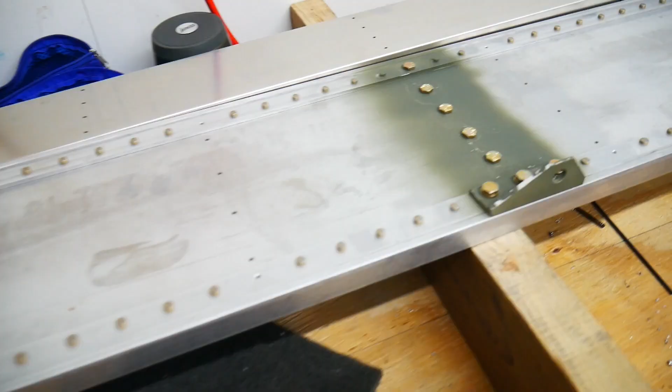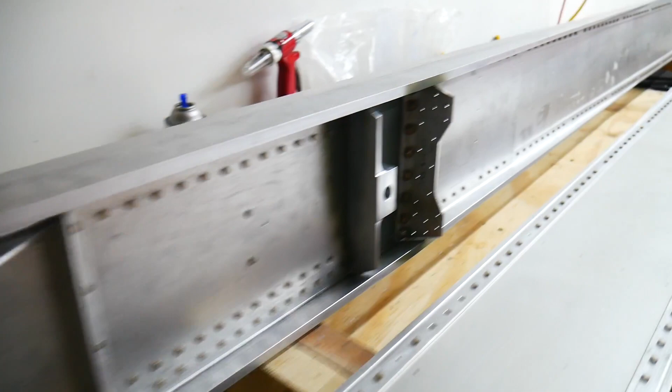Today we're going to be working on assembling our main spar. So just in case you're not sure what a main spar is, the spar is the major component of the wing that holds the majority of the lift that the wing creates. And it's really what needs to be one of the strongest parts of your airplane.

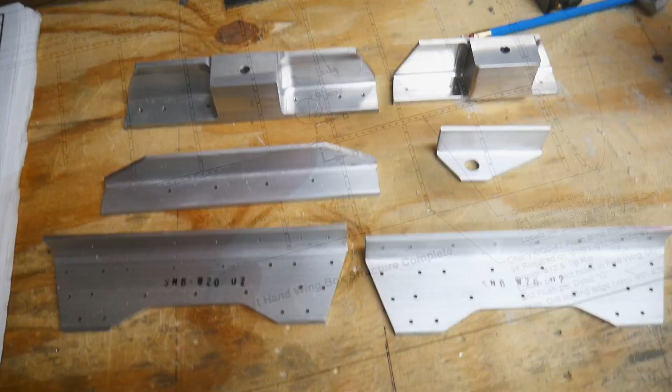But we're going to be adding several blocks to this to give it strength and rigidity. We're going to add in a tie-down mount here as well. And eventually, once we put skins and ribs in place and all that, we'll have a complete wing here that looks kind of like this.

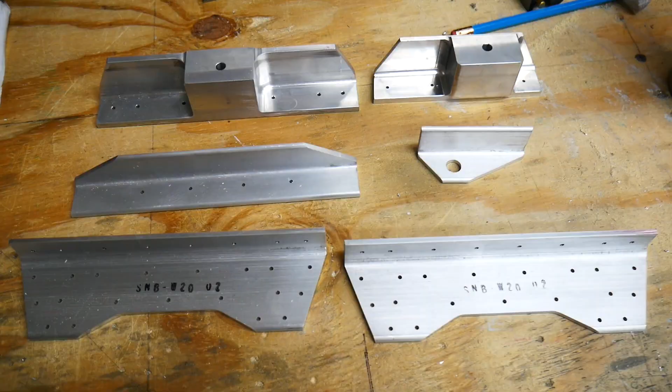So these 6 parts here have to be bolted into certain places on the spar. We also have to add several bolts along this section right here. You can see this one in the back here that I've completed. This is the right wing spar here. The one we're working on today is going to be the left wing spar.

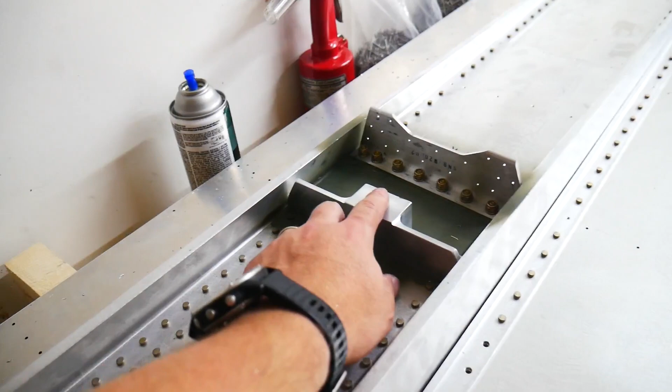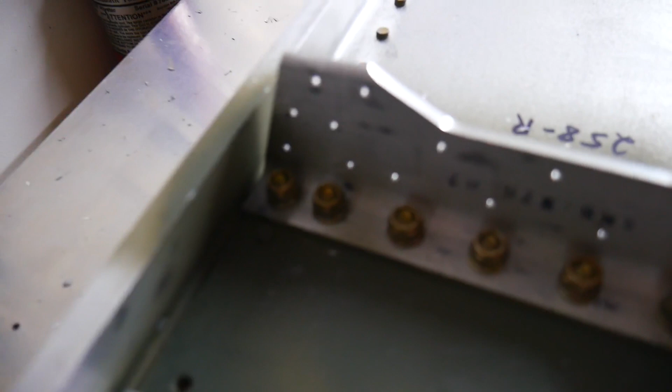I had to drill this hole up to 1/2 inch, which I don't do on the same block that goes on the left. This one here as well goes up to 1/2 inch. And then this main rib assembly piece here, there's lots of bolts to hold it into place. And then if we come down here, you can see where the mount for the tie-down is going to go.

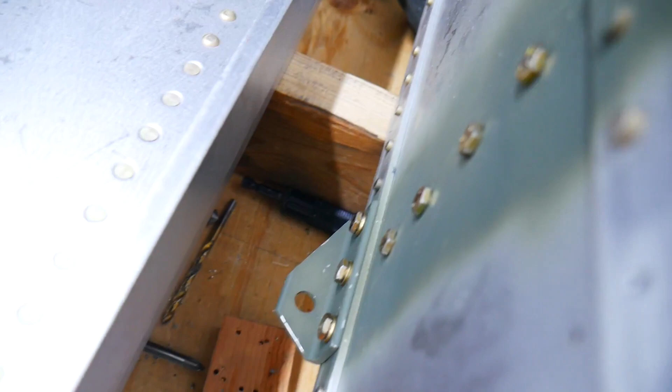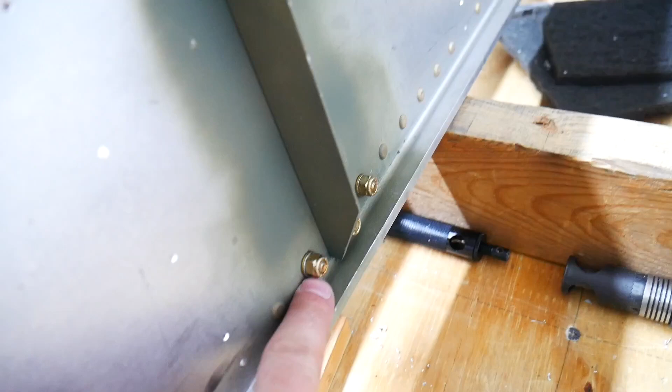Again, the skin's going to kind of go up this direction, so it'll have a tie-down on the bottom of the wing here. So we've got the tie-down mount there. On the back here, there's an angle to stiffen up this outside portion of the wing. I think it's partially to give a good strong support to the tie-down here, but it also will increase strength for torsional rigidity on the wing as well.

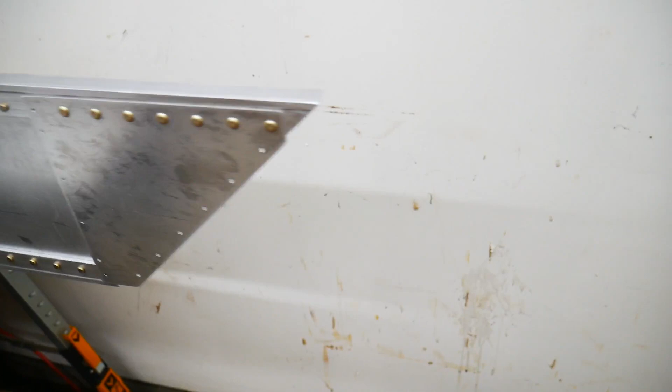There's actually another part that the instructions say to put on. There's like a little angle that will go down here, and to that you can attach the fiberglass wing end. We won't be adding that on today. I'm going to have to move some stuff around in the garage, and that's just asking for disaster. If I put that on, it's just going to end up getting banged up and broken. So we'll leave that off until we're ready to add that.

Now that I've got a little bit more space to work, let's get into this. These 6 parts here are what's going to be attached to the spar. It requires a little bit of machining. So this is for the right hand wing block. Since we're working on the left, this is actually this part over here.

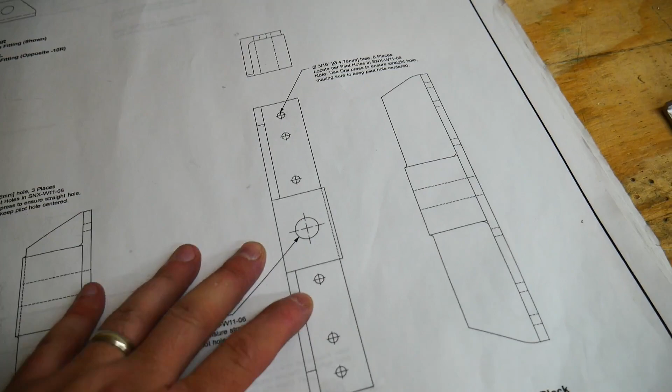And the main difference between these two, if you look at the instructions, is this hole needs to be drilled up to 1/2 inch for the right wing spar, which I did on the other one that I completed. This one you do not drill up. I haven't gotten to that part in the instructions yet, but I assume that eventually we do have to drill this hole up to match this one, and there's a big pin that's going to go inside of that to lock it into place.

And that's the same thing with this smaller block here on the right wing. It has a hole that's drilled up to 1/2 inch, and on the left wing, which is the one we're working on, it does not get drilled up, so it stays the same size.

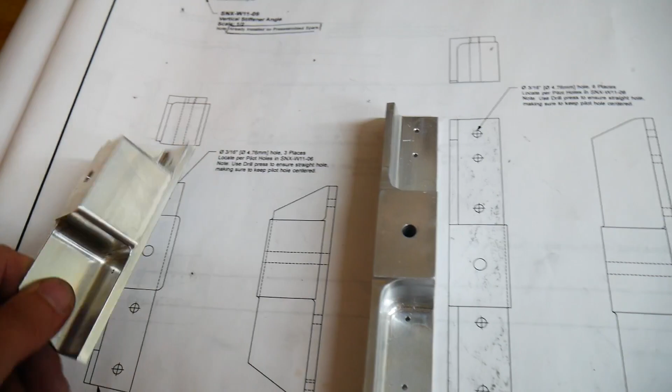We do, however, have to drill up these smaller holes here. It says to drill it up to 3/16 of an inch, and also mentions to use a drill press to ensure that your hole stays straight. So it's probably in your best interest to do that. Again, this is probably the most critical part of your airplane, so taking the extra time to make sure it's done right is very important.

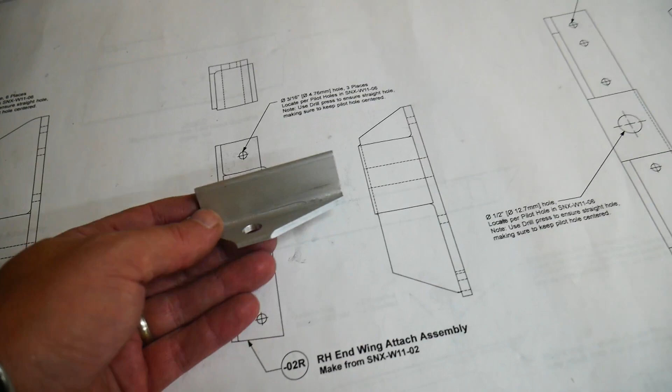We also have the tie-down ring fitting here. This will bolt onto the bottom of the spar, and eventually there's going to be a pin that goes through this with a hoop on the bottom that you can connect a rope into and tie your airplane down. This one right here is called the outboard vertical stiffener angle. Again, this needs to be drilled out to 3/16 of an inch and bolted into place on the spar.

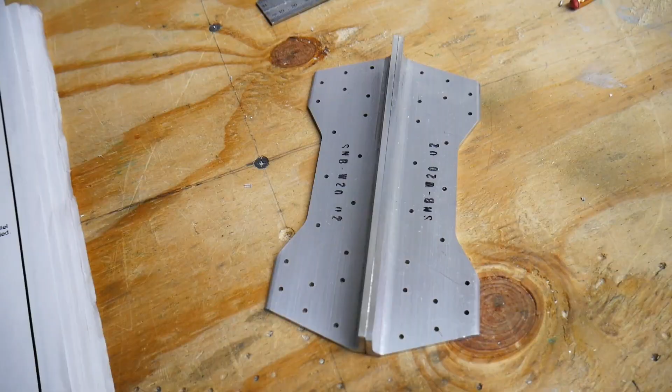And these two right here are what's known as the root rib attach angles. They go front and back across. So if this is the spar standing vertically, they're going to go front and back, and that's where you're going to attach some root ribs to the front and the back.

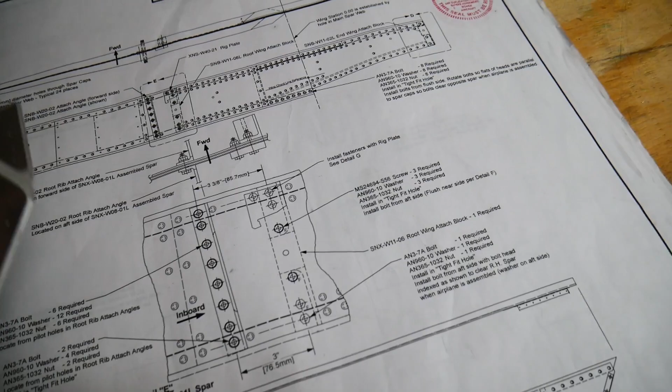This one was probably one of the most difficult parts of this particular job. You'll notice here the main block that we connect here, the root wing attach block, is vertical. It's already pre-drilled for the spar.

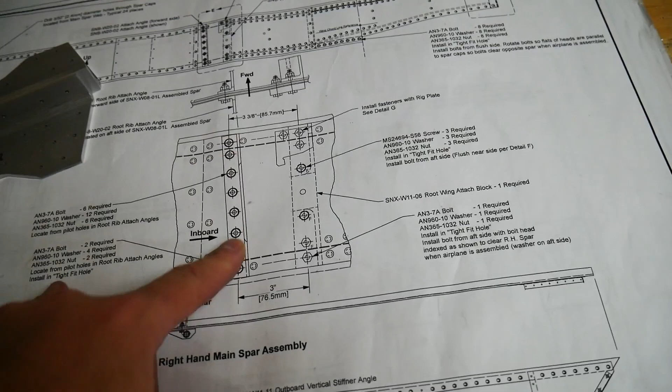These though, these root rib attach angles, they are not pre-drilled, and so you actually have to measure. You'll see from center to center here, 3 3/8 inches, center of this bolt to the center of this bolt. And there's also a couple of pre-attached solid rivets here as well, so you got to be kind of careful there to make sure that they are in the right spot.

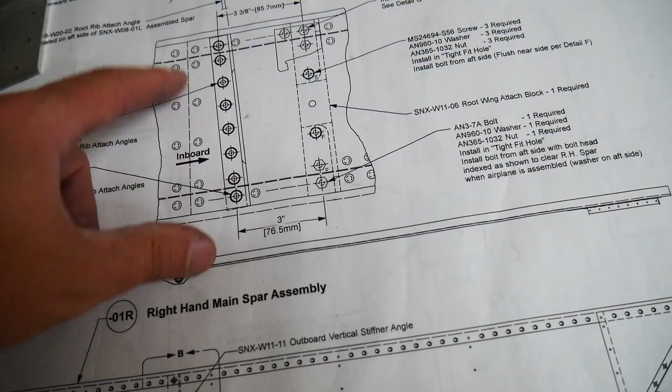And then at the bottom here, though, there's a different size. Instead of being 3 3/8 between holes, these two are only 3 inches between holes. So it requires a little bit of getting in there with a ruler and making sure you measure it out properly to make it fit correctly. So that's probably the hardest part of this entire build here. All right, so I'm going to go ahead and get to work on the drilling of these parts to put the 3/16 holes in them.

You may hear a lawnmower in the background. My wife loves mowing the lawn. I'm a pretty lucky guy. I get to sit in the garage and work on an airplane while my wife mows the lawn. I realize how unusual that is, but I'm grateful for her and her willingness and actually her desire to do that. Anyway, so let's get drilling these parts.

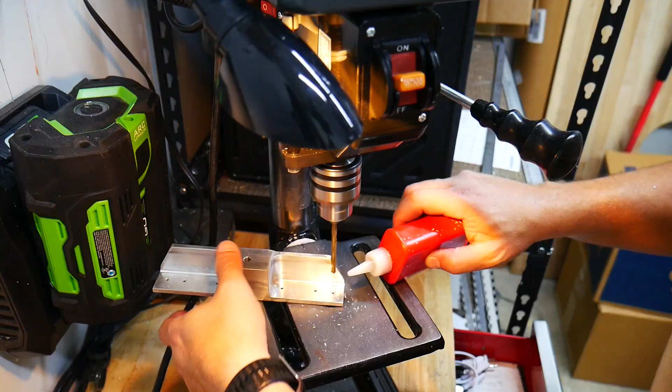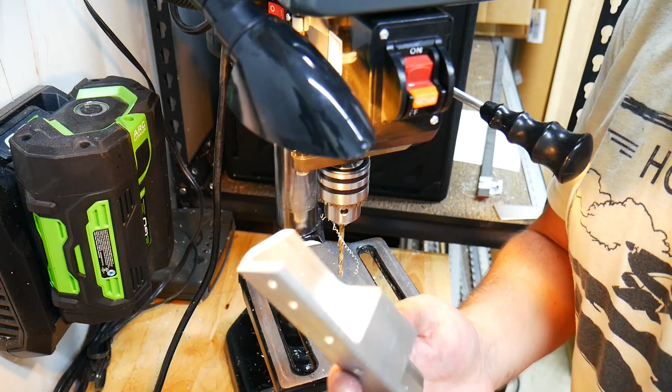Just stopping every few seconds here to make sure that it's staying centered in the punch, just to make sure that it lines up with holes on the spar. Just to make sure that it stays flat, I'm just gonna deburr these holes a little bit, so it doesn't make it crooked as I'm drilling. Alright, there's one part done. Actually looks pretty good. On to the next.

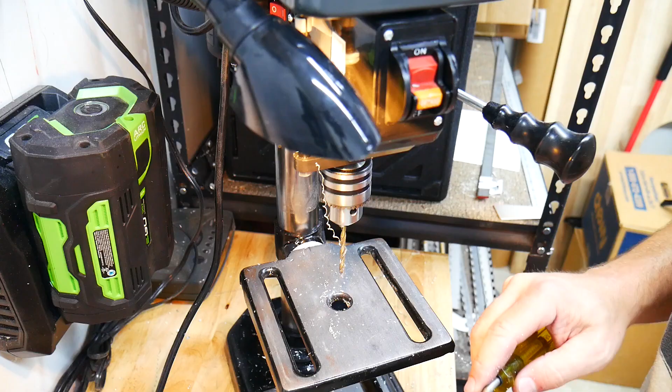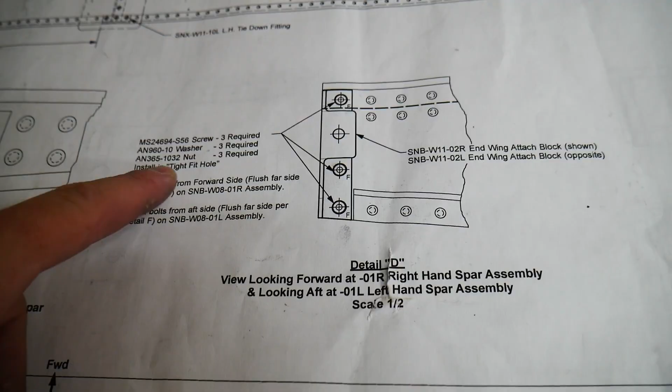Alright, another good piece. Looks just fine. So the next thing we need to do is collect some screws and washers and nuts. So we need the MS24694-S56 screws. We need 3 of those. They have a tapered head on them. We also need 3 washers, the AN960-10s.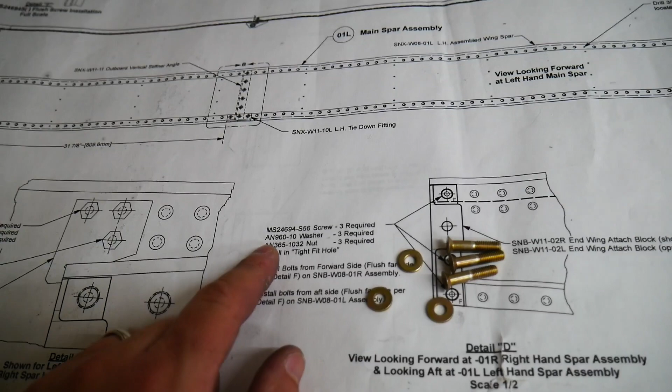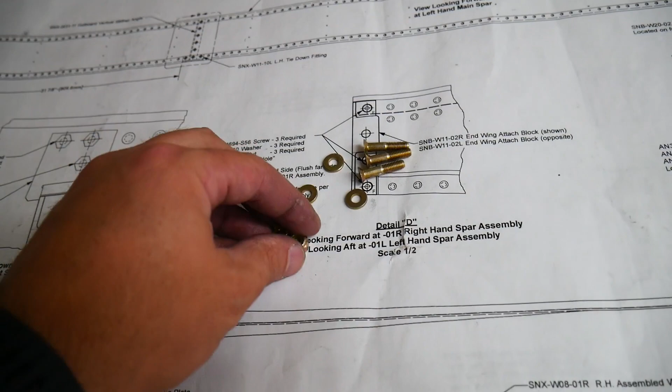And then we also need, and this is something I'm a little bit concerned about here. I'm not totally sure about what to do here. It calls for 3 AN365-1032s. The kit does come with 3 of those, but only 3. I believe what they mean to have there is these 1032-As. And these have an insert, a plastic insert in there to make them lock nuts. And the reason I think that this is marked incorrectly is because, again, there's only 3, but this detail D is meant for both the left and the right.

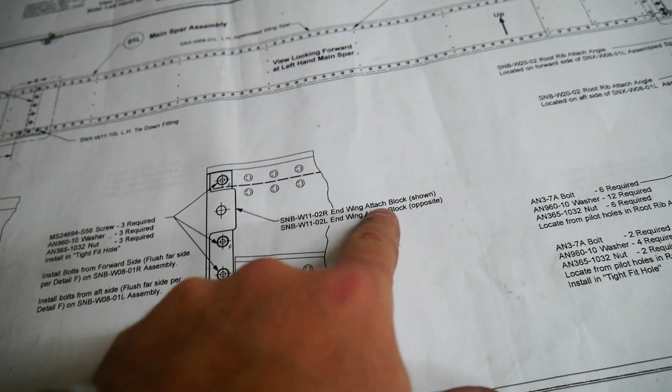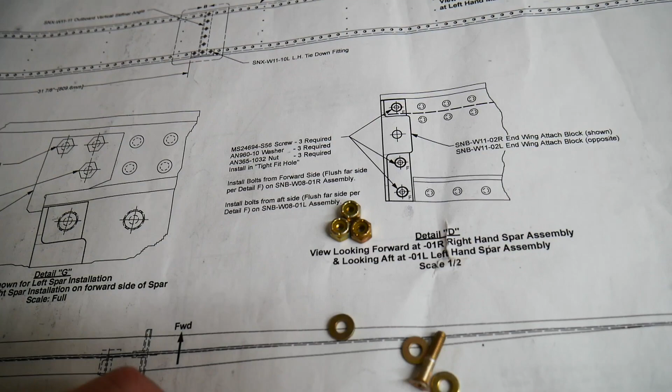And it shows here that these are exactly the same, uses the same exact detail portion here for both the right and the left end supports. So these should be exactly the same, but the kit only gives 3 of the 1032s instead of the 1032-As. Again, the only difference is one has a metal stopper that acts as a locking mechanism. These ones have the plastic insert to lock it in place. Anyway, so I'm going to install it with these, and hopefully that's correct.

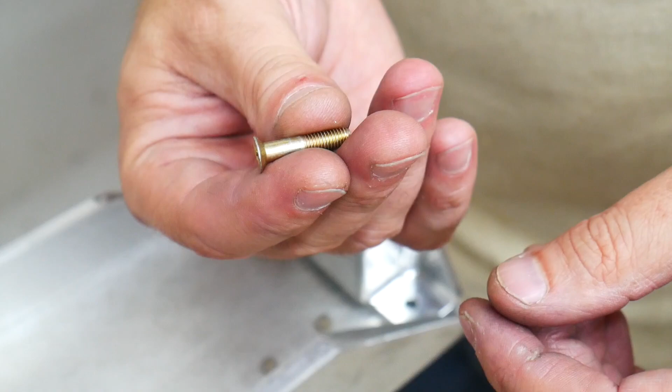Alright, so this block has 3 places to put screws, 2 on the bottom, 1 on the top, and it matches up the part here pretty well. There's actually a centering hole that eventually will be drilled out, just not yet. So we've got these taper head screws that are going to go from the bottom up, and then we put a washer and a nut on top of that.

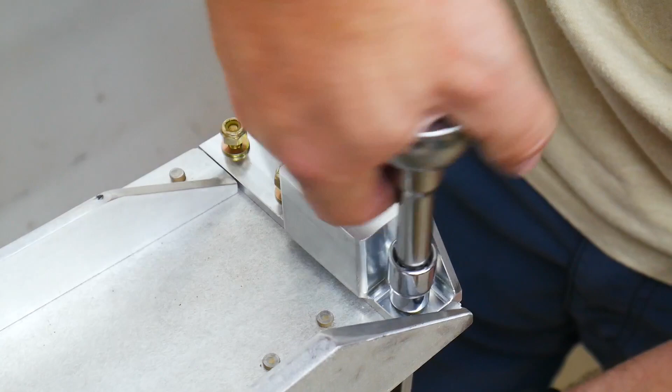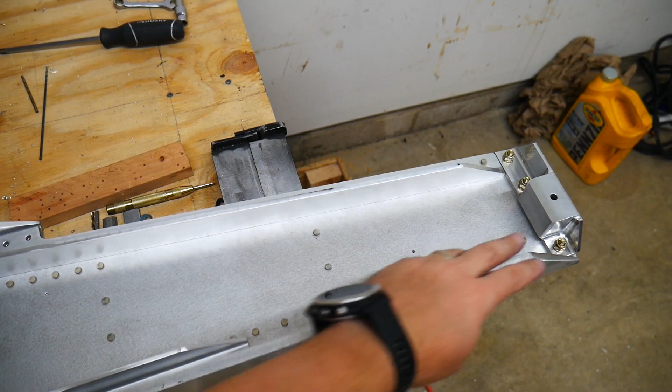So with these AN3 bolts, they're not meant to be torqued down really tight. I think that they're only like 1.5 to 2 foot-pounds or something like that. The key here is to make sure that you're bringing that tapered screw from the backside up to make it nice and flush. Without over-tightening, of course. All right, with this mount block here installed, the next thing to do is flip this thing over and start putting in some of the other parts here.

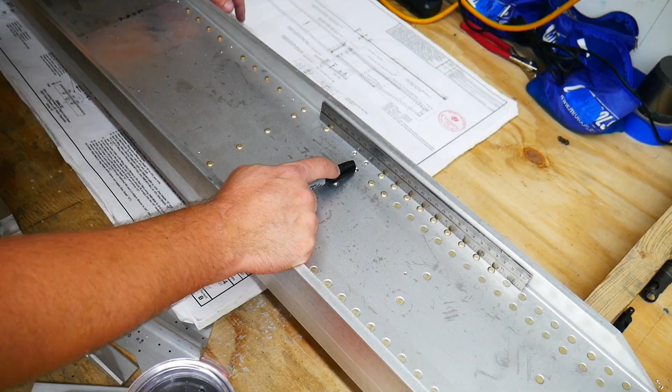All right, so according to the drawings here, I need to make a mark from the center of this hole, and make a mark out to here, 3 1/8 of an inch. Let me just make sure, 3 3/8 of an inch. So I'll line up my ruler here at 3 3/8 right on the top of this hole, and then make a mark down here on the other end, nice and square from there.

There we go. And then from the other side, on the bottom part of this, the distance is only 3 inches. It goes from this hole that you can't see down here, but it's lined up with this, to 3 inches this direction.

I also need to do a straight edge mark going across. Alright, so I have a couple of holes marked here. That should be where these holes line up on either end of it. Alright, now that I have these two marks here where I think they need to go, use this as a straight edge and make a line between the two.

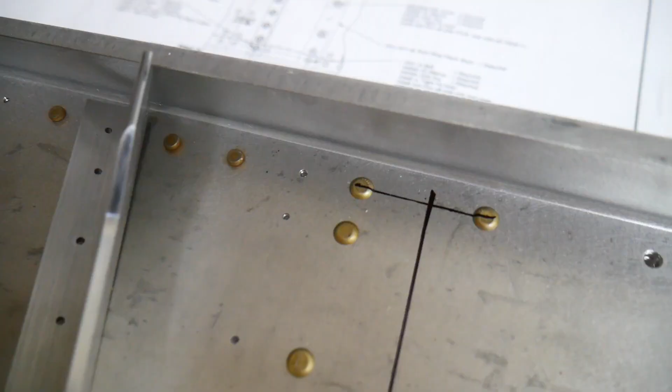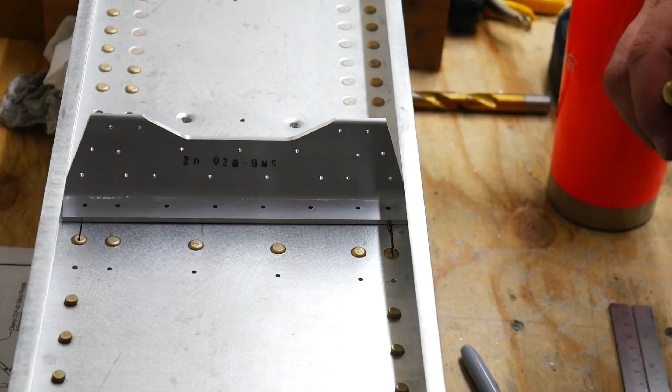There you go. So that's where one hole's going to go. That's where another hole's going to go. And if we line up one of these parts here the way that it goes, get this lined up, and you should see a line going through the middle of all the holes that are pre-drilled, right where they need to go. Alright, and then my preference for this is to line up one of these X's, just in case one of them's off a little bit. And then I'm going to mark it with my tool here.

Alright, so I've got a nice little divot there. I'll go ahead and drill this out. And then I'm not going to drill the rest of these. What I'm going to do is I'm going to cleco this in place to make sure it holds where I want it to. And then I'll drill the holes based on them being in line where they need to be.

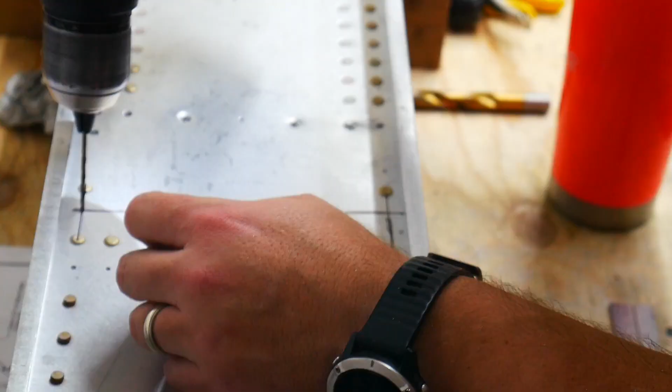What I'm noticing is that the top part of this is kind of bumping into the top of the spar here, which I'm not super happy about. And there's a bit more space on the bottom, even though this is supposedly lined up correctly. Not really happy with that, so I'm actually just going to pull out these rivets and I'm going to start from the bottom instead of the top.

The beauty of this is that I eventually have to drill these up to 3/16 inch bolts, so even though they're not lined up perfectly right now, once I get them in the place that I want it to be, I can then drill all of the holes up to the size that I want.

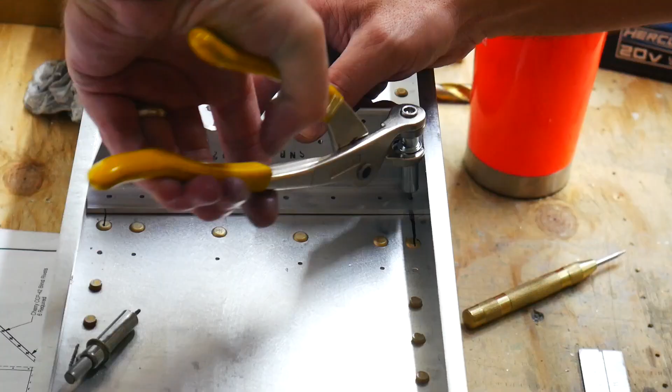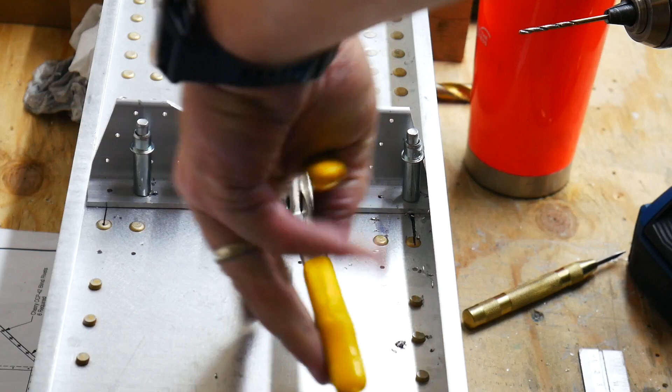Alright, well that's one side of it. We actually have to flip this over and put another one on the back side of this as well. So underneath, opposite. So we have to pull out a few of these clecos in order to add clecos from the other end.

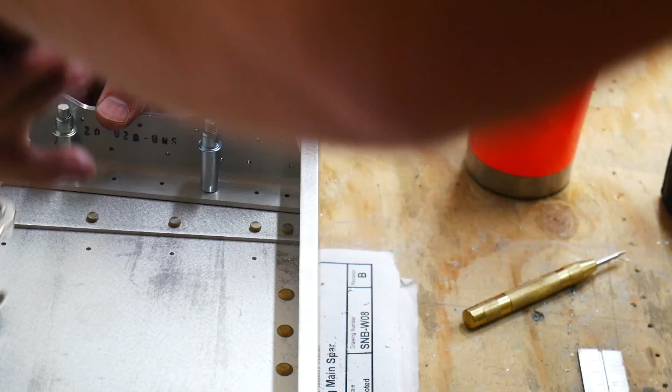All right, well that's in place now, well enough that I can start drilling out some of these holes to the 3/16 size. So we can put in some AN3 bolts right into these holes.

Alright, then it's time to disassemble all of this and clean it up. We need to deburr it and prime it and then put it all back together. A couple clecos that are in here tight enough that I actually have to unscrew them to get them out, which is, I think, pretty good.

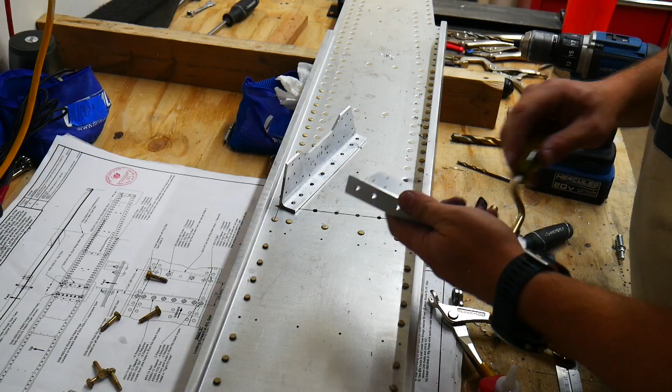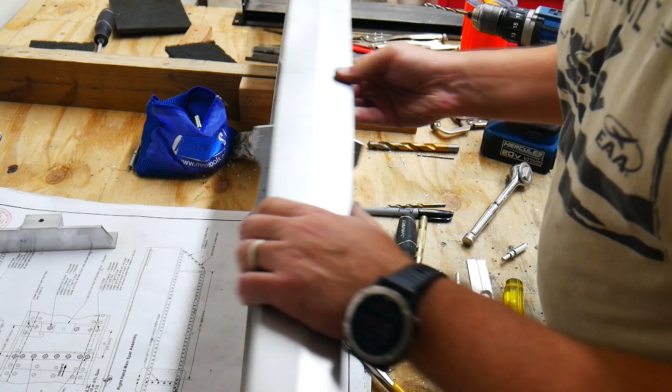Alright, I've gone ahead and added in those AN3 bolts from the back side going forward. It requires washers on both sides, on the bolts on the back side and underneath the nuts on the other side. And now I'm just going to go ahead and tighten these up. They're loose right now, but they all fit in there okay. I'm just going to tighten those up and move on to the next thing.

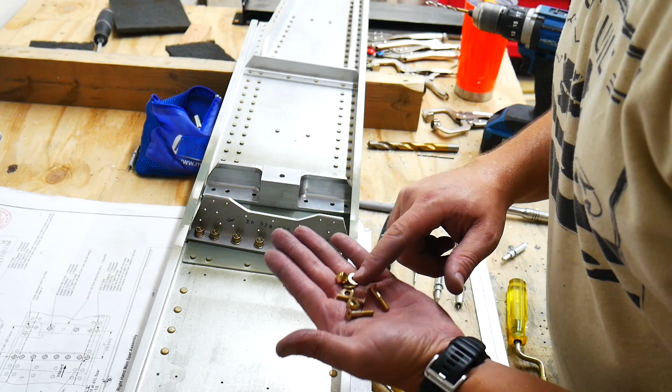Okay, and for this root wing attach block, it requires 3 of these MS24694-S56 screws. They go up from the bottom up this direction. They require 3 washers and 3 nuts as well, which I have here in my hand. Alright, looks pretty good from the back side.

Well, I've had to take a short break overnight. My spar had an issue. It was built in the factory and there was a couple of rivets that were placed in the wrong holes. Let me take you over there and show you what's happened.

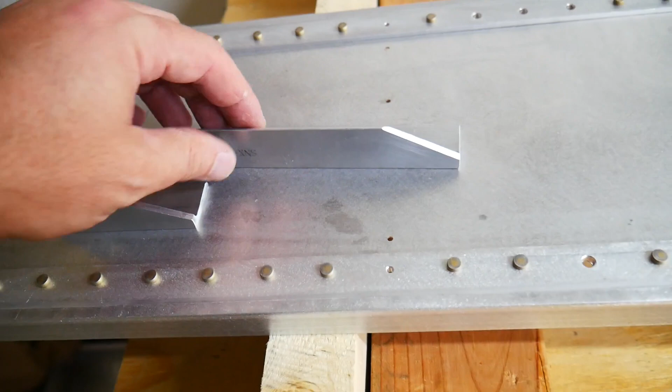So I have 2 more parts here that need to be added to this assembly. This is a stiffener angle. Basically it just gives it additional strength on the back side, and that's going to go down underneath here. And the other is this tie down block. It's going to stick out from the bottom of the wing here. This is the bottom of the wing, and there's a hole here that I'm going to put a tie down eye bolt through, eventually when this is all put together.

Unfortunately, it has to go right where it's sitting right here, and there should be 3 holes right here, 1, 2, 3, and on the top here there should only be 1 hole open and have rivets in these 2 holes. And so it looks like at the factory they accidentally put the rivets in these 2 holes instead of these 2 holes. So what I'm going to end up having to do is drill out these 2 rivets in order to put this in place with 3/16 bolts, or AN3 bolts.

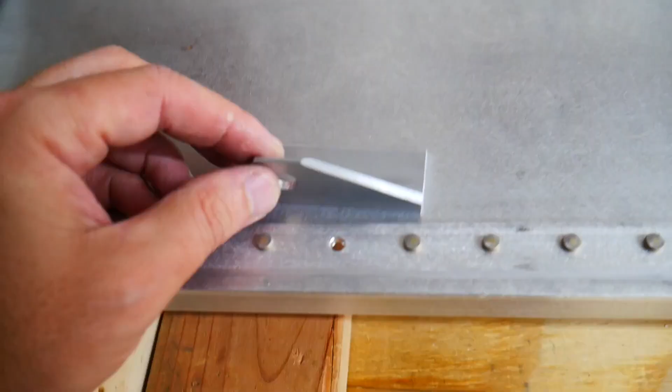And then that will allow me to put this here in the back underneath for additional support. So one way or another, these 2 rivets have to come out before I can progress. And so that's what I'm going to do today. I'm just going to go ahead and drill out these 2 rivets, and we'll worry about these 2 later on, but we'll get this all supported and put where it needs to go, and then it should be as simple as just adding the 2 rivets here, or bolts, or whatever it is that Sonex tells me to put in place there.

I can just get this top to twist off now. Go.

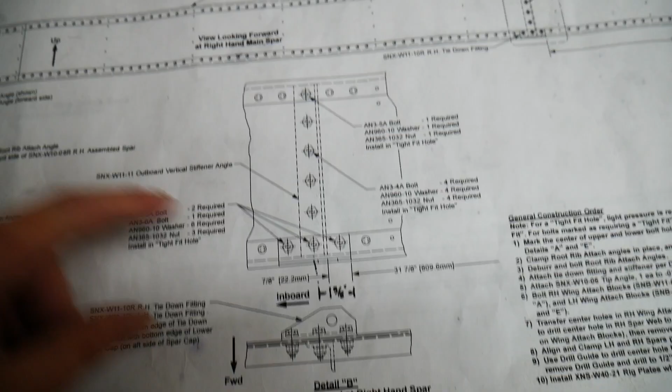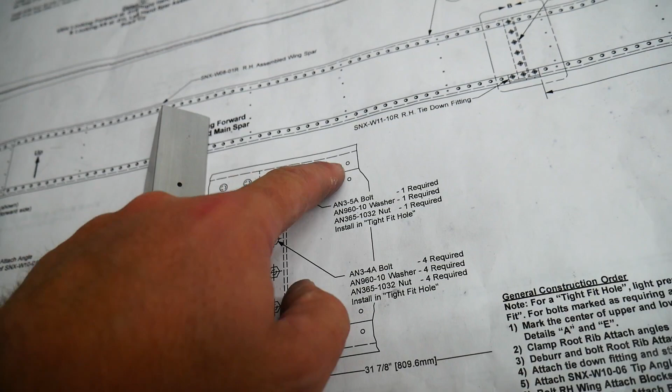Alright, so the next step is we're going to connect what they call an outboard vertical stiffener angle here. That's going to go out here on the edge of the wing. This is the right side. Let's go up to the left side. The angle is going to protrude perpendicular to the wing, going towards the front. And we also want to put it in line with these rivets here, where the holes are actually already here. You'll notice that this only has 4 holes instead of the 6 that we need to have.

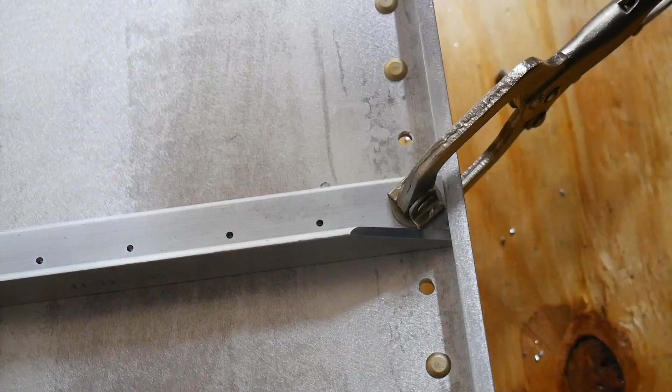I'll simply line up this hole here with this line all the way around. Make sure it's centered this direction as well. Okay. So hopefully you can see the small lines right down inside of that. I'm going to go ahead and drill those out with a number 40 drill bit and put in some clecos.

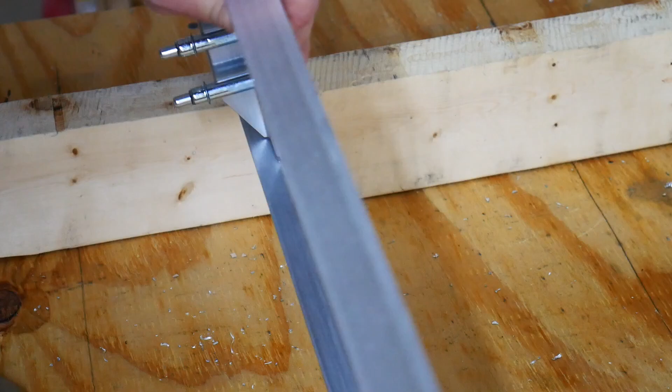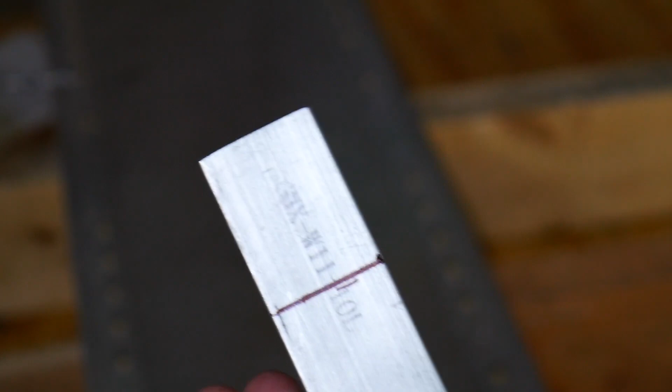Alright, the next thing to do is figure out how to get this thing centered on here properly. Then I can just line it up, clamp it, and then drill it from the back side as well. Alright, so this part right to the center is 1 3/8. Got ourselves a nice little line here that cuts this piece right in the middle. So we're just going to line that up from the other side and drill it through.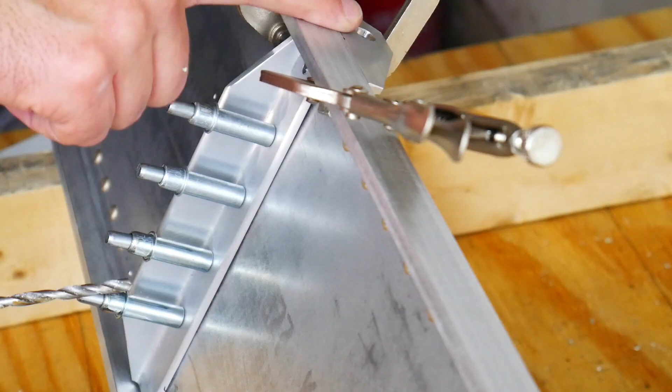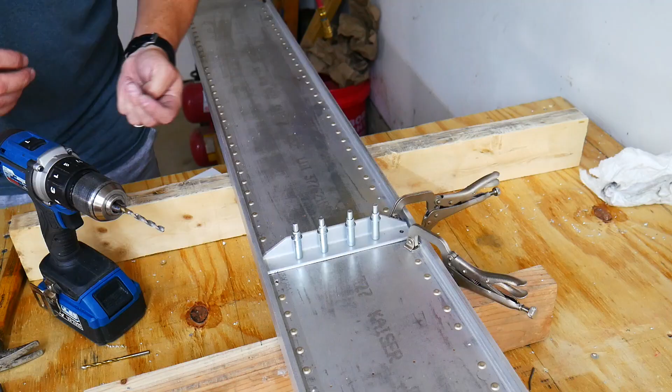Alright, so I have the tie-down block here, lined up flush here, and with the center line right in the middle of this hole, which I'll drill out now. Alright, then I'm just going to drop a bolt into the hole there. Another washer and a nut on the back side, just to hold that from moving around.

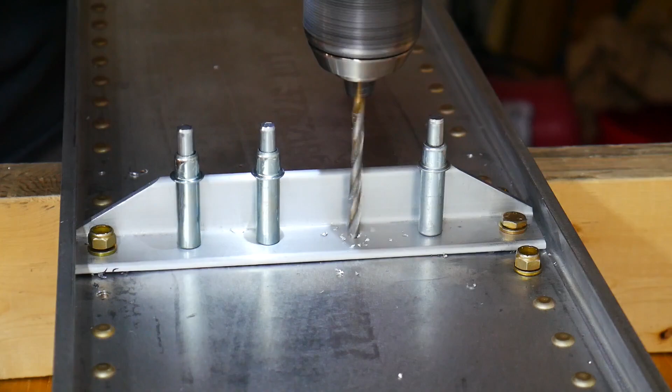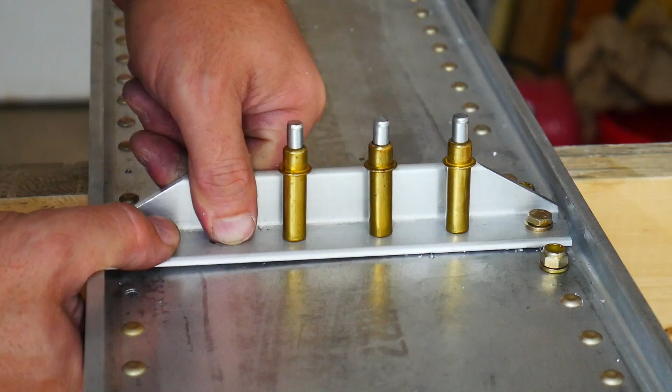Alright, so they're all lined up. Everything's drilled except for where these 3 clecos here are. So I'm going to go ahead and drill those out as well. Alright, well those are all in place where they need to go. Just going to pull it all apart and deburr everything. Give it a little spritz of primer. And this part will be completed.

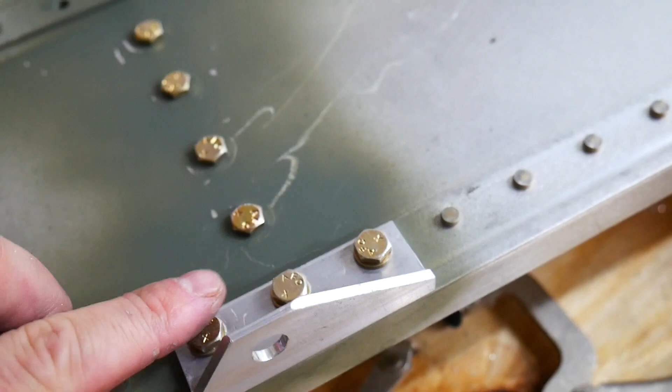Alright, there we go. We got our tie-down block. It's nice and flush here. We got all the bolts in place where they need to go. The only thing I need to find out now is these holes here that were drilled by Sonex originally in the wrong spots. They should have been drilled down here. They weren't. I actually had to drill out these rivets and then put the bolts in place. So these were already drilled to the wrong size, so we'll see what Sonex has to say about that.

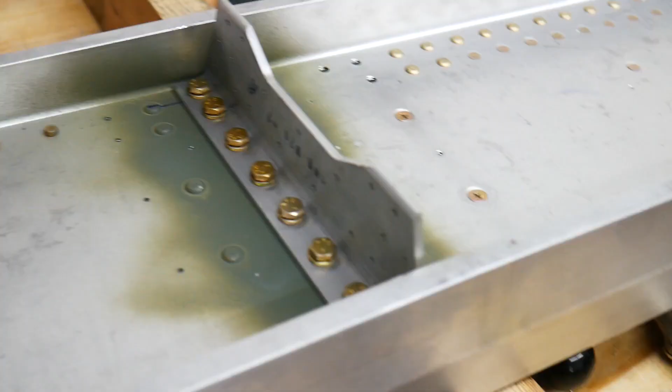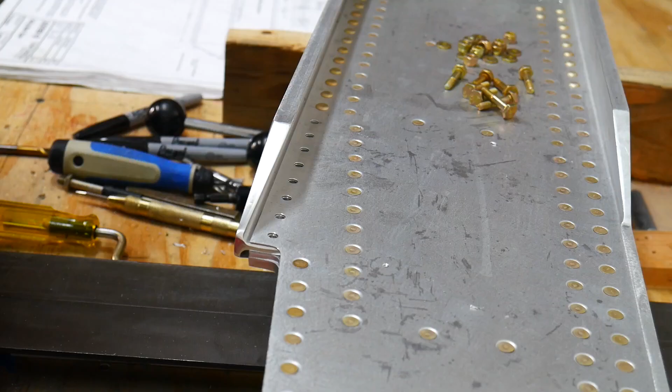And up here we have our root wing attach blocks installed front and back on both sides. And down here. Now I need to add some bolts to these open holes right here. The instructions call for AN7 bolts. The bolts go through the flush side, not the non-flush side. And then once you put these into place, the flat side of the bolt should be parallel to this end here, so that when you slide the parts together, they have clearance where the bolts are. So make sure that this is, again, parallel with the length of the wing spar here.

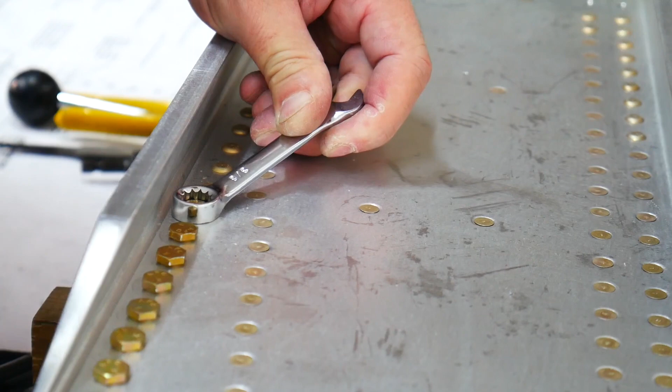Alright, well this one was a little bit easier to do than I first thought when I was looking at the diagrams. It turned out to not be quite so intimidating once I started actually putting the parts together. It does take a little extra care in looking at the details and making sure you've got them all right. It was a little bit frustrating to see the issue that Sonex had made on the part. Still waiting to hear back about what I need to do there. My assumption is just we're going to be putting in some AN3 bolts to fill in those holes where the rivets would have normally been. Anyway, I imagine this is all going to come together just fine.

One thing I haven't done yet is there's some rig blocks that I need to put on each of the spars, and you can't really do that until you fit the two of them together and drilled a couple of holes to get them centered and all that stuff. So that's going to be a different video, but pretty happy with the progress that I made today, and I guess I'm going to go ahead and end this video here.